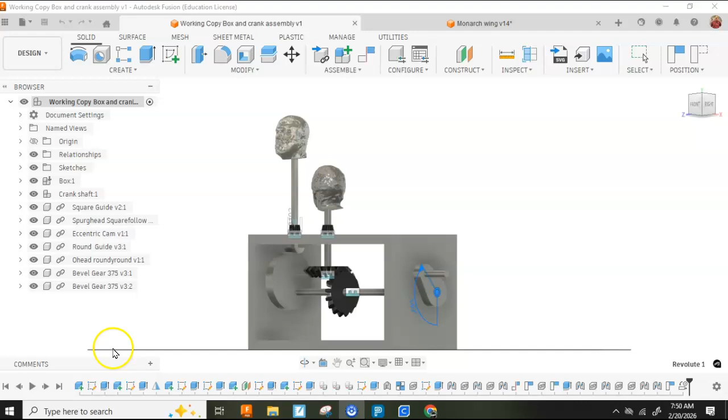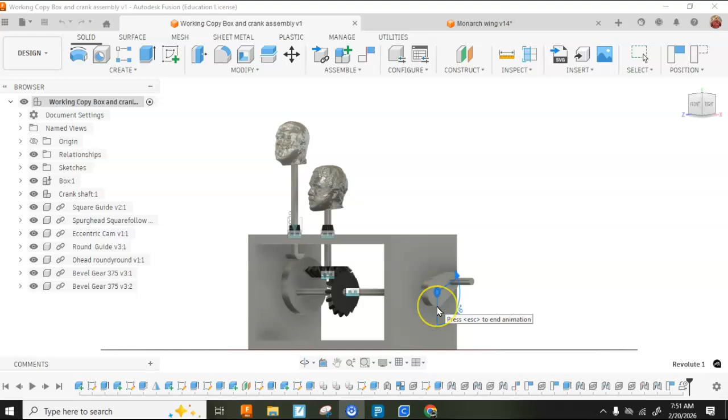Okay guys, so far we have covered a cam and a follower rod, taking this rotating motion and turning it into a reciprocating motion. Then we've turned the rotation 90 degrees using bevel gears. I'm going to show you how to design a wing and push that up and down.

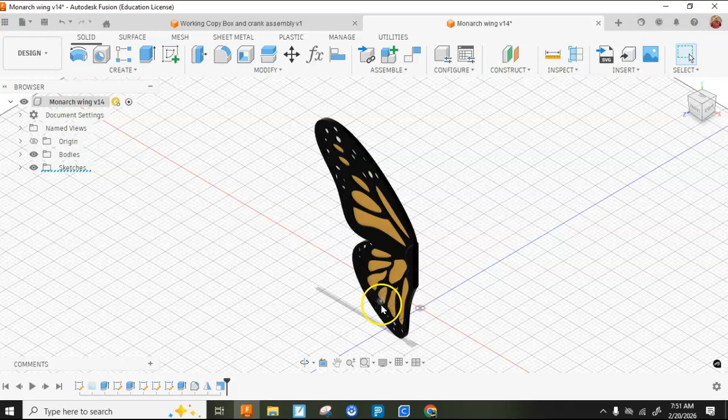Wings can be complicated. Here's an example of a wing that's relatively advanced - it took a lot of time to trace that in there and then extrude different lengths trying to do it fancy. We're just going to do the joint that will show us how to make a wing work. You can spend as much time or as little time as you want on this.

So I'm going to start a new design. I'm going to choose hybrid design - this is a new screen over the last month. If you choose hybrid design it will put you into the user interface that you are used to, so this looks like it always does because I chose hybrid design.

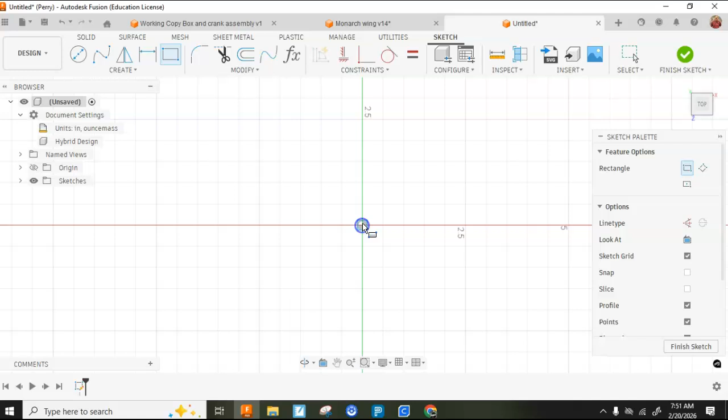I'm going to begin by just putting a sketch here, and I'm going to do a super simple wing. I'm going to do a rectangle that is 5 inches tall by 3 inches wide. I'm going to extrude that 0.3 inches.

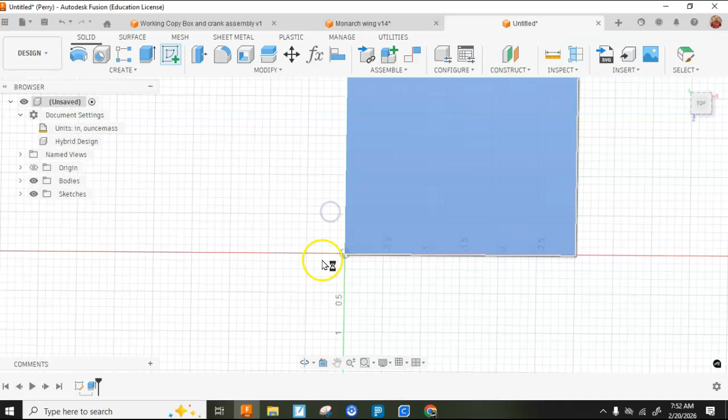Now what I'm going to do is lay out a hinge, and I'm going to lay it out in two parts. I'll show you here - I'm going to create a sketch on top. I'm going to be symmetrical with my work here, so I'm going to choose a line, come over here and start down 1 inch, hit enter.

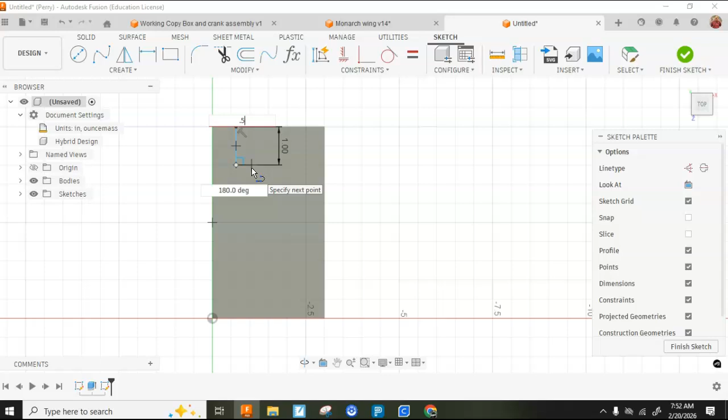I'm going to choose a line, come over a half inch, 0.5, enter. I'm going to come down from that 3 inches, and then I'll come back - if I go up there and click that, it'll let me snap to it, 0.5, and then down.

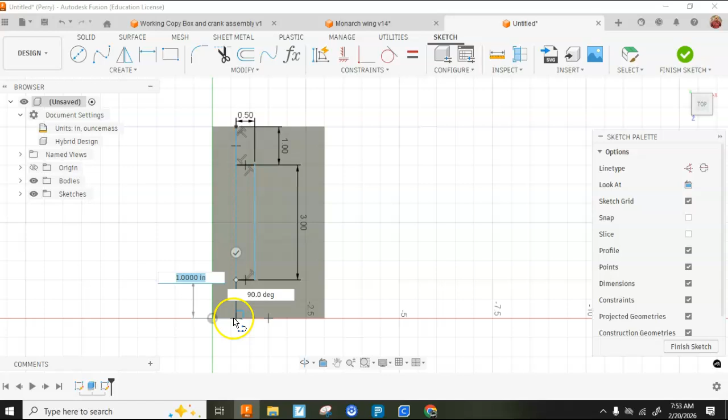Now I'm going to offset this - that offset I'm going to make 0.1 inches. That's going to end up being a gap, you're going to see I'm going to cut that out of it here in a second. So I'm going to finish the sketch, and now I have one body, but it's got these lines on here.

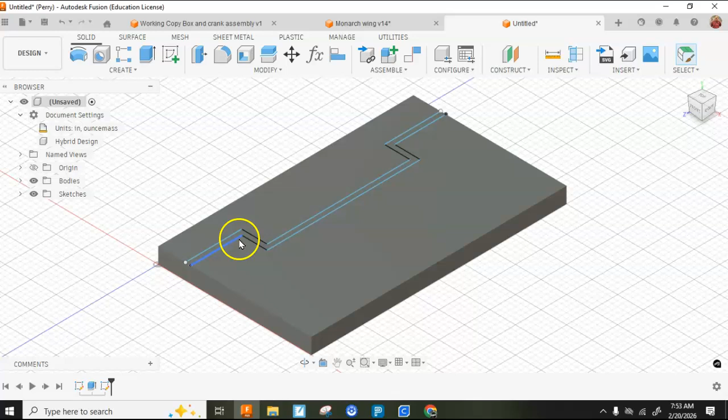What I'm going to do is split the body. So I'm going to go to Modify, Split Body, Body to Split, and choose that body. Splitting tool, I'm going to choose this line and that line. Then I'm going to hit OK.

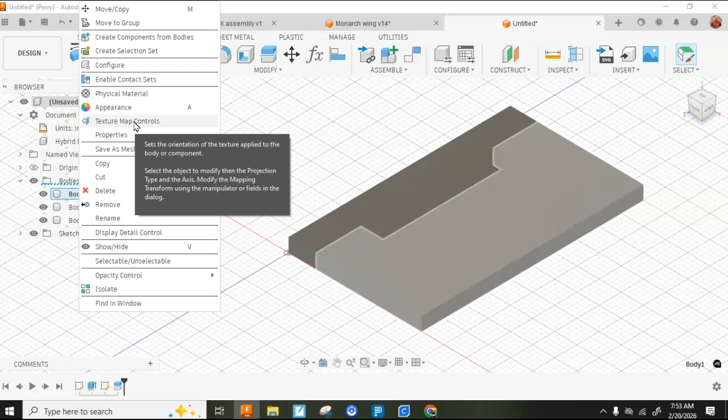So it doesn't look any different, but you'll notice that I have 3 bodies over here. It's going to start looking much different as I come here - I right click and hit Create Component from Body, for each one. I'm going to change my visual style to shaded with visible edges, and now you can see those are different things. So this is component 1, component 2, component 3.

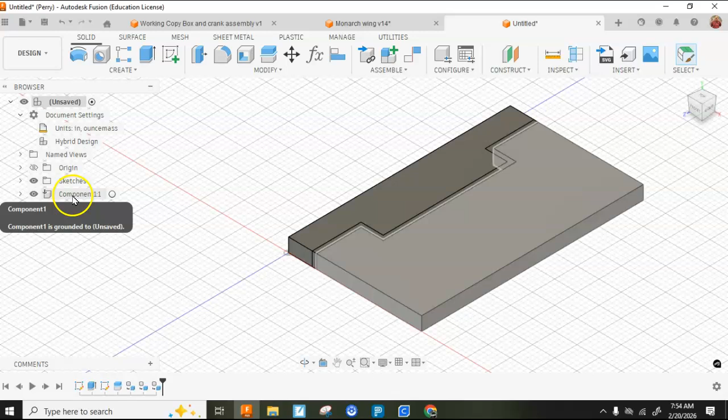Component 3 I want to remove, so I'm going to right click, come down here and hit remove. Now component 1 is grounded. I want this to be the body of a bird or an insect or something like that, so I want to make this one, which is component 2, grounded - I'll ground to parent.

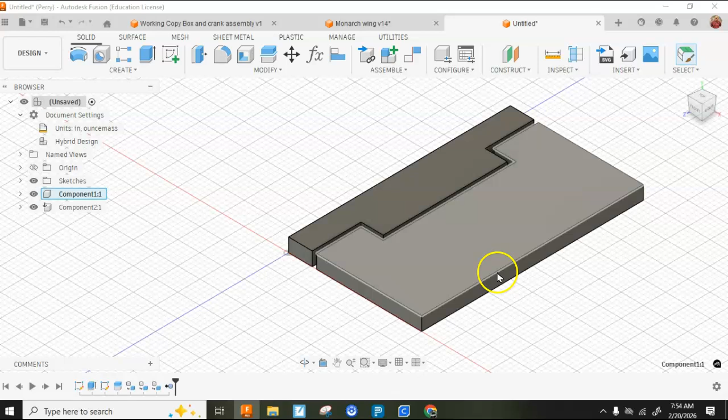This one I want to be ungrounded because this is going to hinge and move freely. So now I'm going to put a pivot in - I'm going to create a new component, come up to this top level, go new component, and hit OK.

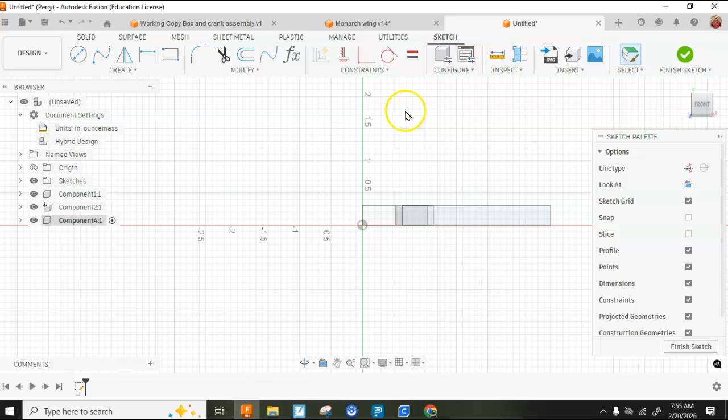I'm going to sketch on this face here, and then I want to come across and go right in the middle of that. I want to use... actually I'm going to go 0.15 and hit enter.

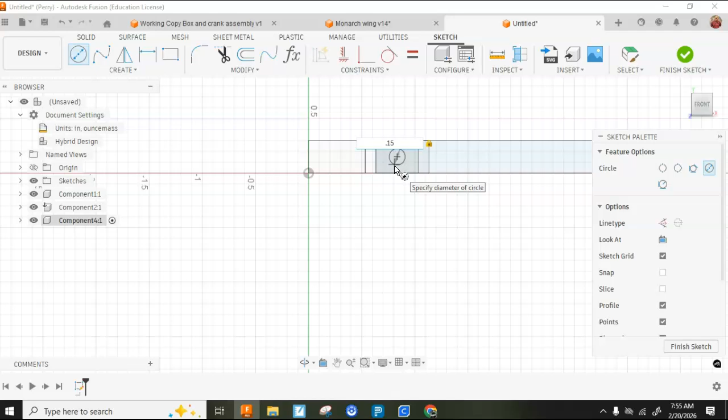And now I'm going to extrude this through there as a cut. And if you notice, there's a hole there. So now I'm going to come back here and, oops, come down here and click on that button.

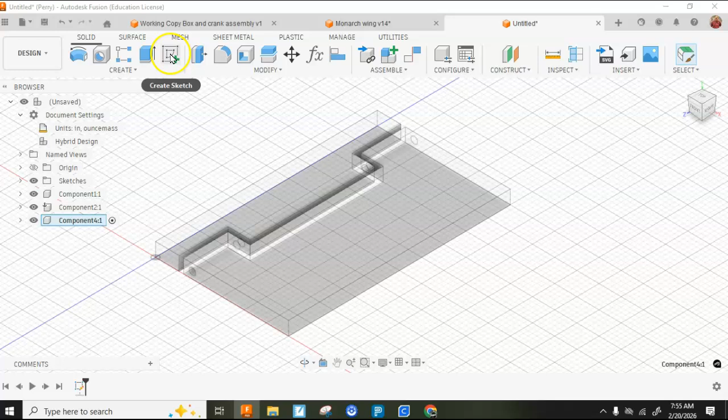Now I'm going to sketch again, and I'm going to do a hole that is a little bit smaller than that, which is just going to be 0.1. It's a little smaller, that means it's going to fit pretty easy. Now I'm going to extrude this.

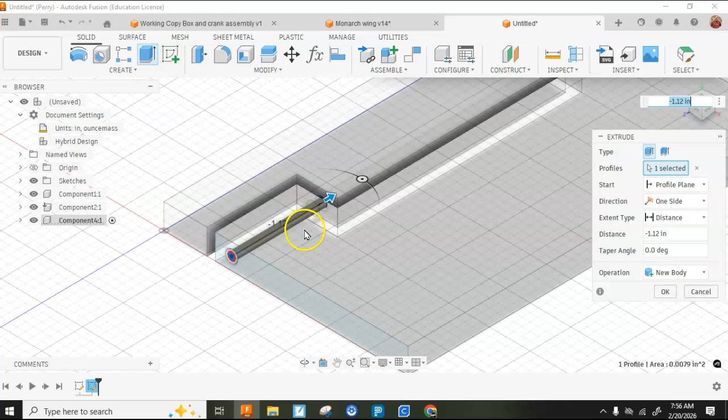I want to extrude it all the way to the other end, so rather than - well I know it'd be 5 inches - actually I can just say it's going to be 5. That would be fine, and go there. All right, so I am almost done.

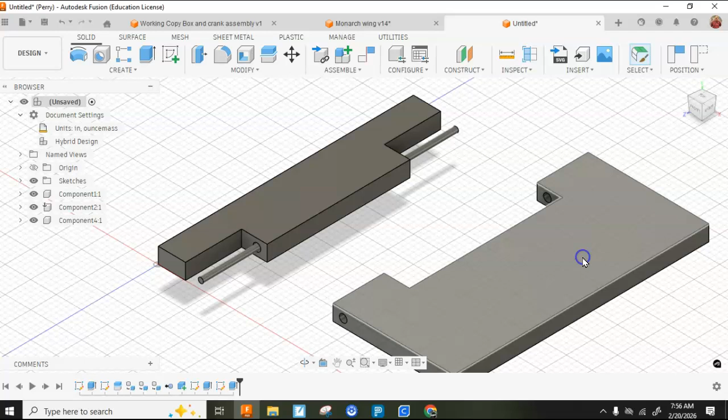But right now these are free to move. I'm going to hit Control Z to keep this pretty simple. All right, so I'm going to do assemble - it's in place. As built joint, I'm going to choose component 4 and component 2, and that will be rigid because I would have that fixed in there.

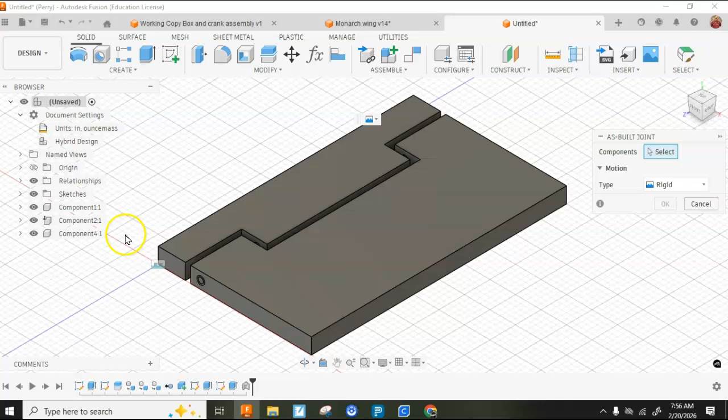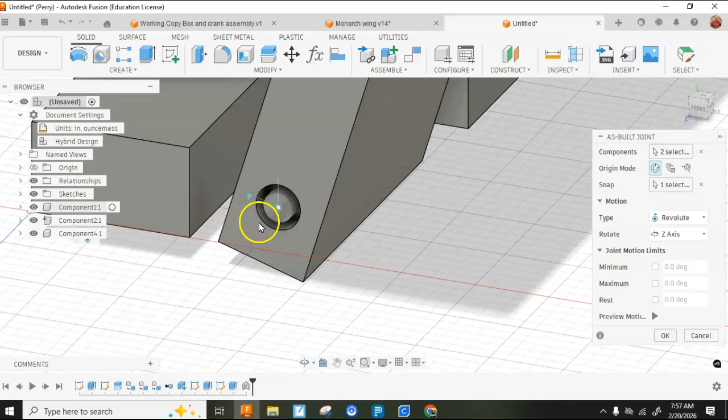And then I'm going to do it again, as built joint. I'm going to do this part, the wing - revolute - and this part, and then it's going to ask me for what point do I revolve around. That's the snap point, and I would choose that right there. So when I hit that, I now have a working part.

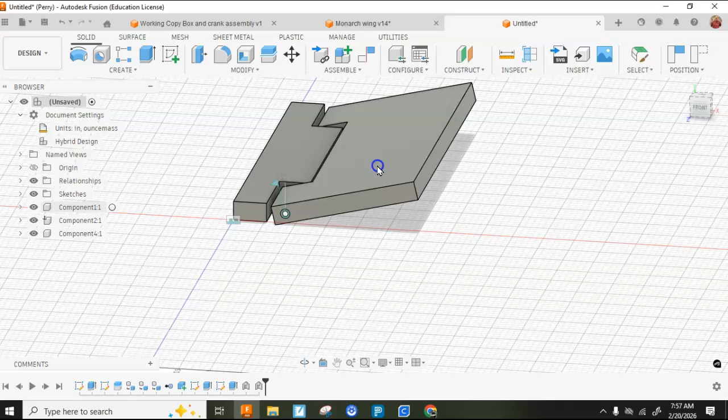So now I'm going to take this, mount this rigidly to the top of my box, perhaps put a post underneath it to lift it off the box a little bit, and then I'm going to put a cam, much like this, with a follower that comes up and pushes the wing up and then lets it drop, pushes it up and lets it drop. This will require some tinkering to really give it the range of motion that you want.

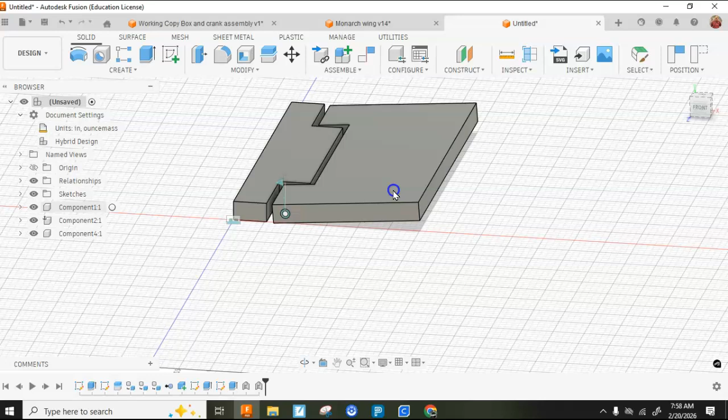You can do it certainly mathematically, you can do it by plug and chug and try multiple iterations. But this will be the first video in part 3 - I'm going to go ahead and start another video to actually assemble this.

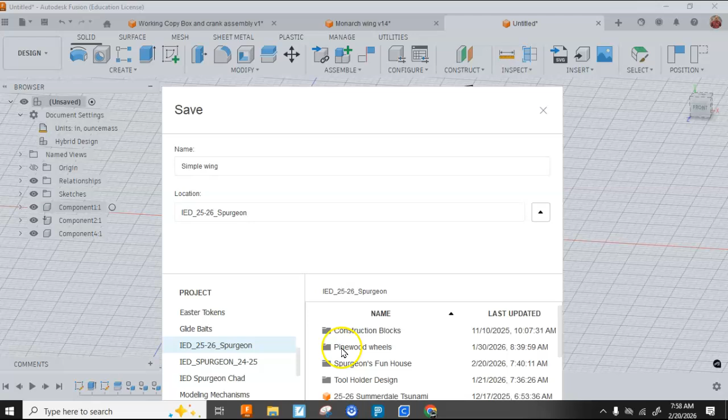So I'm going to go ahead and save this. Whoops. I'm going to save it as simple wing, and I'm putting this into the proper place, going into Spurgeon's Fun House, and I'm going to save there. All right, I'll pick up in a second and put this in there and we'll make it move. I might go through and fillet some edges and make this prettier.